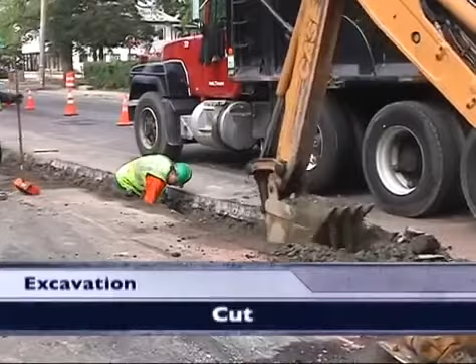First, let's talk about three important definitions. An excavation is any man-made cut, cavity, trench, or depression formed by the removal of earth or soil. That means either mechanical or hand removal. You may have heard the terms excavation and trench used interchangeably, but there is a difference. A trench is an excavation that's deeper than it is wide, usually not wider than 15 feet.

Bottom line is that nearly all trenches are dangerous if not protected, due to the fact that they're narrow and you can get trapped. Some excavations, however, especially on large building sites, may only be dangerous near the slopes. It's important to know the difference and to always be on your toes.

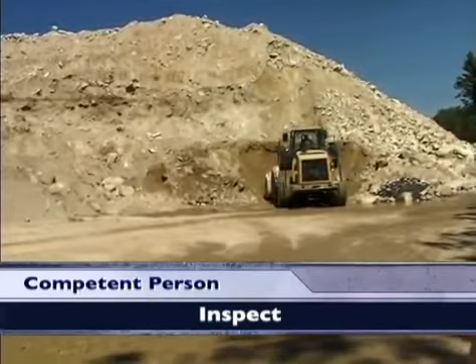You've probably heard the term competent person. I'm the designated competent person on this job site. It's my job to identify existing hazards or to predict hazards that may occur in the excavation or in the surrounding areas. Every day I have to take a close look at the conditions of the site to make sure that all the protective systems are keeping workers like you safe.

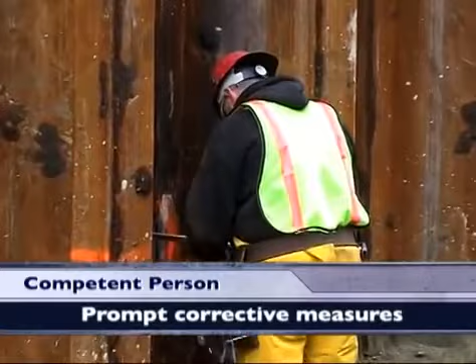I've got to determine whether working conditions are unsanitary or hazardous to workers, and it's my duty to take prompt corrective measures to eliminate any danger. Basically, it's my job to make sure that you and your coworkers can do your jobs safely.

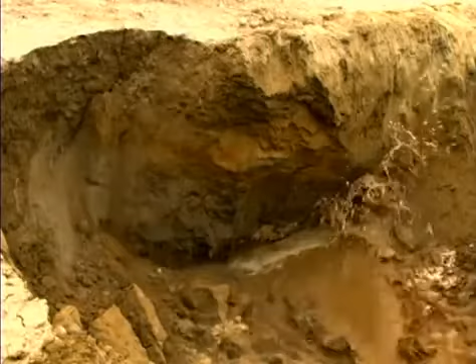Did you know that cave-ins are the leading cause of death in excavation work, and that collapses are 18 times more likely to result in death than common construction accidents? Cave-ins aren't the only dangers involved in excavation work, though. Other hazards include water accumulation, the collapse of nearby structures, and hazardous atmospheres produced by toxic gases in the soil.

That's why if you ever think that there's a potential danger of a collapse or any other type of hazard, you must tell your supervisor, foreman, or the competent person immediately. I can't stress enough how important it is to speak up. With all these potential hazards looming on a job site, no one's going to get upset if you're being overly cautious. You could be saving someone's life, possibly your own.

An employee was installing a small diameter pipe in a trench 3 feet wide, 12 to 15 feet deep, and 90 feet long. The trench was not shored or sloped, nor was there a box or shield to protect the employee. Further, there was evidence of a previous cave-in. The employee apparently re-entered the trench, and a second cave-in occurred, burying him.

Since cave-ins are the most common and the deadliest hazard in excavation work, let's look at them a little more closely. When dirt is removed, the surrounding soil becomes unstable and gravity forces it to collapse. When soil or rock falls or slides into the excavation, the cave-in could entrap, bury, or otherwise injure and immobilize people working in the excavation.

Most cave-ins occur in trenches 5 to 15 feet deep and occur suddenly with little or no warning. On average, about 1,000 trench collapses occur each year in the United States, and over 95% of injuries occur in trenches without any protective systems.

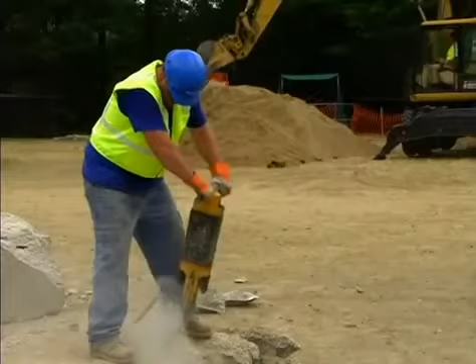Soil conditions can change and shift, so they must be constantly evaluated. There are certain factors that could change the surroundings of the site, making a cave-in more likely. For instance, it rained here last night, and water could potentially affect the state of the soil. So I constantly check the condition of the soil and of the surrounding site and evaluate any condition that may increase the likelihood of a collapse.

If you're the designated competent person on site, that'll be your job too. But it's also important for every worker on site to know and recognize some of the most frequent problems and to communicate them immediately. Water is one factor that can increase the risk of a collapse. Other factors include temperature change, vibrations from heavy equipment. Even the surrounding load, like a spoil pile, can affect the conditions of the excavation.

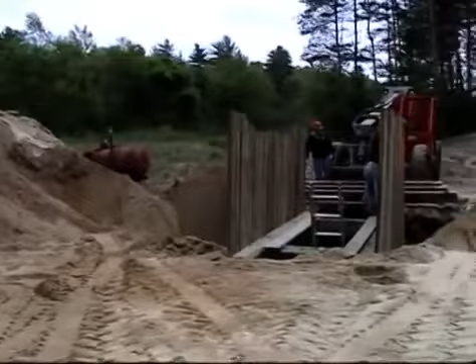Also, a lot of the soil that we work in has been previously disturbed. Previously disturbed soil is different from soil that's never been excavated. It can contain backfill or other materials that can rapidly break away from native soils. Sometimes there are visible warning signs around the excavation that can be spotted before a cave-in occurs. And if you're aware of these warning signs, your chances of getting out before a collapse increase significantly.

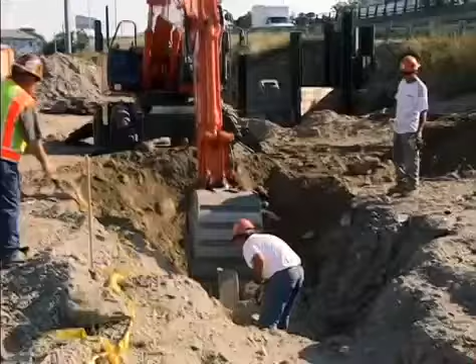Some of these visible signs may include ground settlement or narrow cracks in sidewalls, slopes, or the surface next to the excavation. Flakes, pebbles, or clumps of soil may separate and fall into the excavation, or there may be changes or bulges in the wall slope. If you notice any of these signs, get out of the excavation immediately and get your coworkers out too. A life is too high a price to pay to overlook any one factor or warning sign.

Cave-ins are possible, they can happen if you're not careful, but they can be prevented. And let's face it, preventative measures take a lot less time and effort than an emergency retrieval. There are different types of cave-ins that happen in various types of conditions. For instance, a spoil pile slide is probably the most common type of cave-in. It occurs when dirt is piled too close to the edge of a trench.

A shear wall collapse occurs most frequently in clay or layered soils. Part or all of one side of the wall begins to crumble into the trench, along with the weight of the spoil pile. The height of the falling soil is added to the weight, generating a great deal of force. An average collapse of 2 to 3 yards of soil can weigh 4,000 to 6,000 pounds, or nearly the weight of a pickup truck. A lip slide may be an indicator of a potentially more hazardous collapse to come.

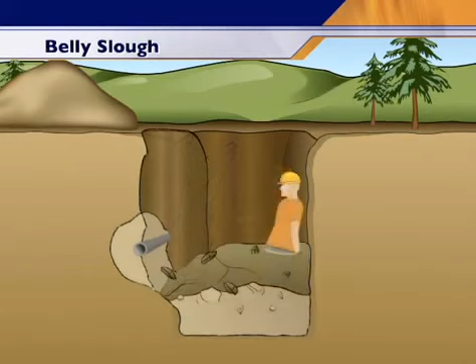A belly slough often occurs in areas near underground utilities or where running water is present. This type of slide occurs when softer soil weakens under the more stable soil. The collapse can be rapid and usually buries or traps the victim quickly. The resulting overhang makes rescue more dangerous and difficult as well. Telltale fracture lines often appear near the bottom wall of the trench before a belly slough occurs.

Boiling and heaving and squeezing are two other types of soil conditions that need to be taken into consideration when working in a trench or excavation. Boiling is marked by an upward water flow into the bottom of the cut, creating a quick condition, like quicksand. Heaving and squeezing is a downward pressure created by the weight of surrounding soil or adjacent equipment that causes a bulge in the bottom of the cut. Both boiling and heaving and squeezing may contribute to or indicate a potential collapse, and both conditions can occur even when support systems have been properly installed.

Your safety and the safety of your coworkers is the number one reason why the right type of protective system is used for the soil that you're working in. But before you choose a protective system, you have to test the soil to determine what type it is. Now, not all dirt or soil is the same. Solid rock is most stable, and sandy soil is the least stable. You've probably heard that soil falls into 4 types: solid rock and types A, B, and C soil. Let's talk a little bit about what these classifications mean.

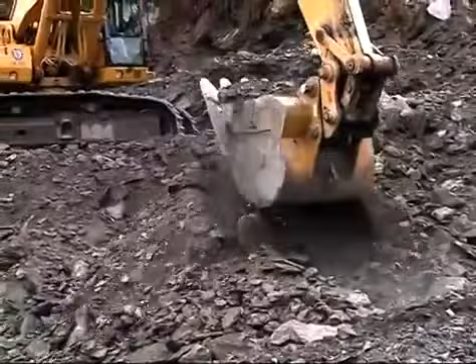Solid rock, in most areas that I've seen it, requires explosives for removal, and it becomes a lot less stable when you blast it. In certain cases, you can scrape away at it with frost hooks or vibratory hammers. But for the most part, solid rock isn't something that we work in on a regular basis.

Type A soil is stiff and cohesive without fractures or cracks. A few examples might be caliche, typically found in the southwest, or hardpan, also called glacial till. Now, you'll know this soil if you've worked in it. Hand digging is backbreaking. And if you've worked in these soils, you also know that their condition can change quickly. Caliche can be seamy, and hardpan turns to slop when it gets too wet.

Now, it's important to keep in mind that no soil can be considered Type A if it's fissured or cracked, or if it's subject to vibration of any type, or if it's been previously disturbed or has seeping water. If the soil is part of a sloped or layered system where the layers dip into the excavation on a slope of 4:1 or greater, the soil can't be considered Type A either. These layers could slide off of each other, causing a collapse. The problem is it can be difficult to determine which way the layers run.

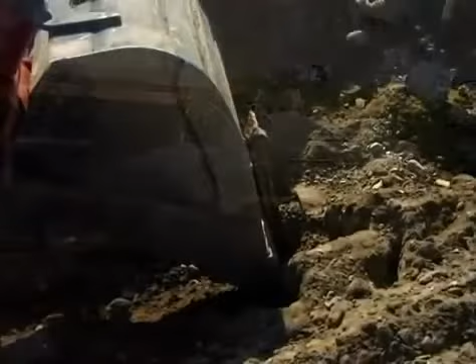Type C soil is the most granular, like sand or gravel. And Type B is somewhere between Types A and C, like subsoil or silty sand. Even some crushed or blasted rock could be classified as Type B soil. Sometimes soil may have to be reclassified if the conditions affecting its original classification change in any way, such as with the addition of water from any source. Now, many times we're digging around existing utilities as well, which increases the potential for collapse and for changing soil conditions. This is especially true with bedding materials used for most utility installations.

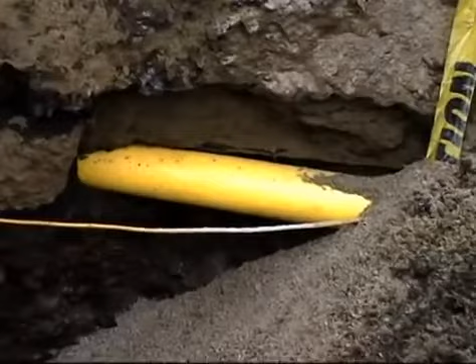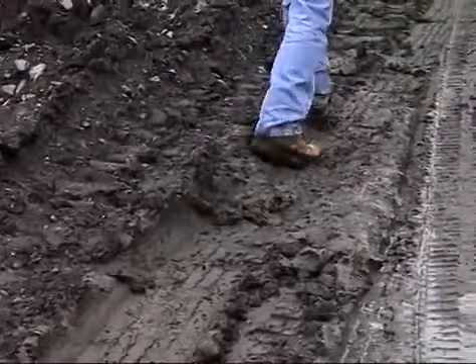Now, there are some inherent problems in classifying soil as anything other than Type C. You have to be careful because sometimes soil is layered. There may be a Type B soil on the surface, but a few feet into the dig there might be a layer of Type C soil. And how frequently do we find water on job sites? These conditions point to classification as Type C. So soil should be treated as if it's Type C unless proven otherwise.

There are several ways to classify soil. Test bores taken before work begins provide a good indication in advance of the type of soils to expect, but you can't just rely on lab results. Out in the field, besides looking at the general excavation site and its surroundings, as the competent person, I have to perform a visual analysis of the soil itself.

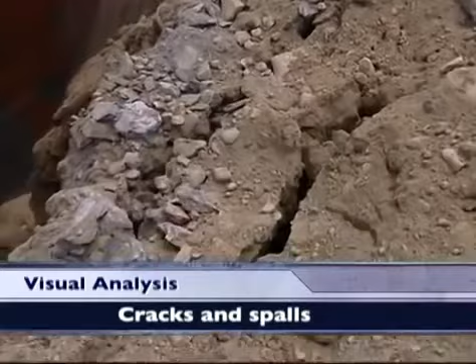I check the composition of soil samples to see if the soil is granular or cohesive. I look for cracks and spalls in the sides of the excavation and around the adjacent surface area. I also check for existing utility lines and any other underground structures, and for any previously disturbed soil in or around the excavation. I also need to look for sources of vibration and surface water. Each one of these factors can affect the excavation stability and influence the type of protection needed before you get in.

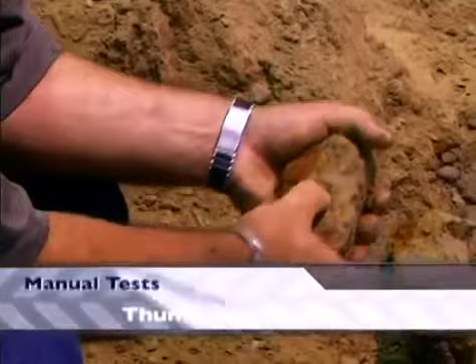Manual tests must also be performed on soil before excavation begins, and there are a number of methods that can be used. Some of the methods test the cohesion of the soil, or how well it sticks together, and other methods test the strength of the soil. The thumb penetration test is probably the easiest soil test. All you do is press your thumb firmly into the soil. If your thumb doesn't go any further than the length of your thumbnail, it's most likely a Type A soil. If your thumb penetrates the full length of your thumb, then it's probably Type C soil or very granular. The problem with this test is that it can be very subjective.

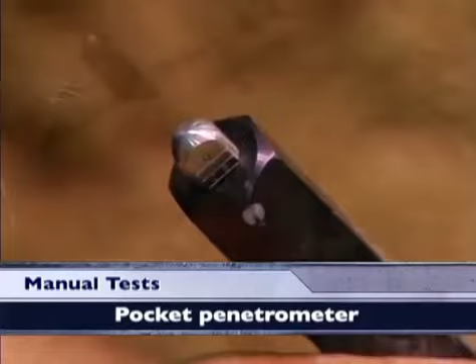When I need to document my test results, I usually use a pocket penetrometer because it gives a reading that's easily interpreted, and it's typically accepted in the engineering community. But even this device has its shortcomings. You have to try to avoid rocks and other particles that could influence the reading, and you don't want to test in an area where the soil's obviously been disturbed. It's important that the reading is taken in fresh samples, typically right from the spoil pile. You insert the shaft about 1/4 of an inch into the soil with smooth, constant force, and take the reading from the indicator ring here.

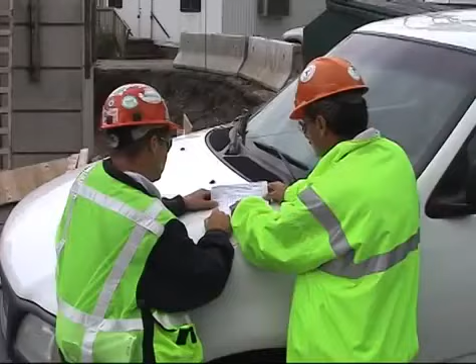The limited accuracy of manual tests is one reason why many contractors have a policy to simply classify everything as Type C. This can be a costly and time-consuming policy to implement, but it definitely cuts down on the variables and the arguments about who classified what and why. I should probably also talk just a bit about documentation. While OSHA doesn't require that these visual and manual evaluations be documented, it's a good idea, especially on the off chance that something bad does happen on site. Many contractors use a daily inspection form like this one to document their safety efforts.

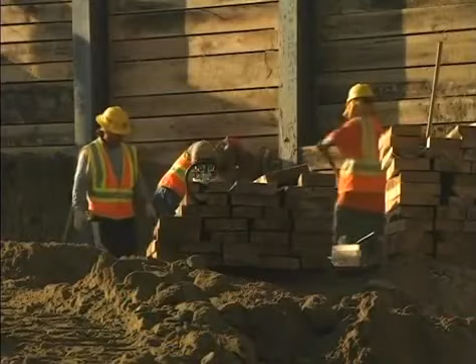Once you've finished performing visual and manual tests and you've established a soil type, then you can determine what type of protective system you'll need. If your company automatically assumes Type C, then that planning process has already begun. There are various types of trench protective systems to meet pretty much every type of soil condition.

Protective systems protect workers from cave-ins, from material that could fall or roll from an excavation face or into an excavation, or from the collapse of adjacent structures. Protective systems are required in nearly all excavations. Now, selecting a protective system for an excavation depends on soil conditions, the depth of the trench, and environmental conditions surrounding the site. One thing that's for sure, though, a registered professional engineer must design protective systems for excavations any deeper than 20 feet, no exceptions.

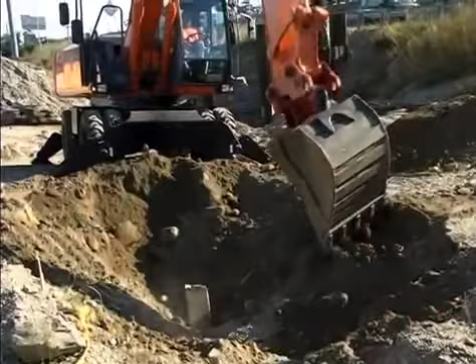You can slope or bench an excavation, which means cutting away and angling the excavation face, or you can install support systems like trench boxes or shoring. When you slope an excavation, you cut the sides back to a safe angle using relatively smooth inclines. The safe angle used in sloping and benching, known as the maximum allowable slope, depends on the type of soil that's being excavated. For Type A soil, the maximum allowable slope is 3/4 to 1, or about 53 degrees.

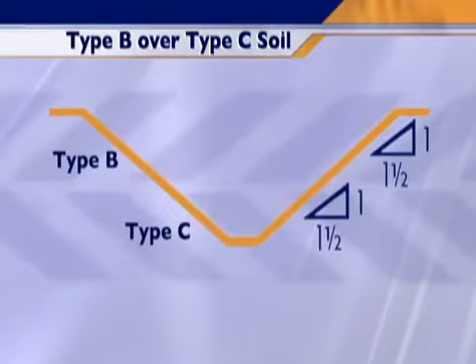Type B soil is 1 to 1, or about 45 degrees. For Type C soil, the maximum allowable slope is 1.5 to 1, or 34 degrees. The maximum allowable slope varies for layered soils as well. Basically, as you can see, the more granular the soil, the more gradual the incline.

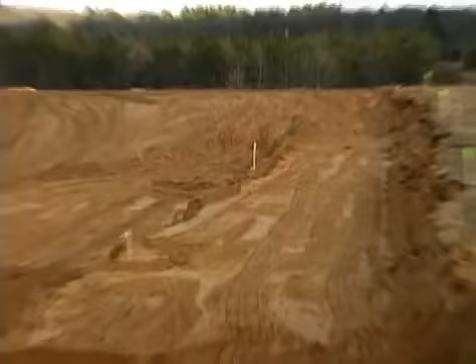Benching is similar to sloping, but instead of smooth inclines, you cut the sides of the trench wall back using a series of steps. Again, the angles for benching depend on the type of soil. One important thing to remember, though, is that you can't bench Type C soils. They just won't hold the bench properly, and they could collapse.

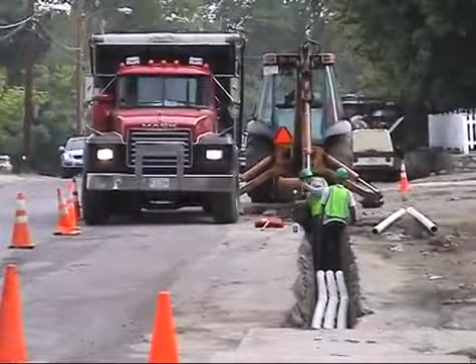Many times, trenches are in narrow places or roadways, so sloping and benching aren't options. In these situations, support systems like shoring or shielding are typically used. There may even be instances where you may have to combine sloping or benching with a support system. Shoring structures are typically made of metal or wood. They're designed to support the sides of a trench and prevent soil from caving in. They basically consist of plating held firmly in place with expandable braces.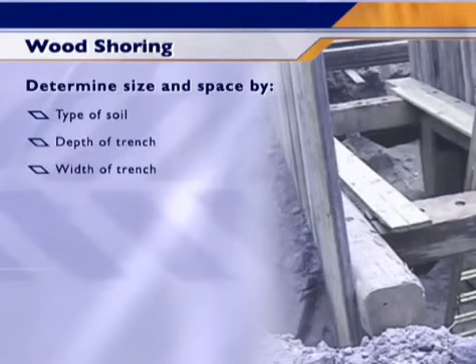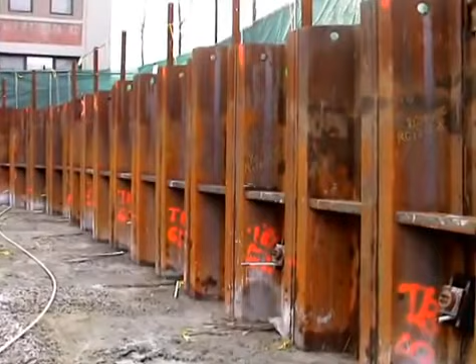There are many types of shoring systems. Some of them are easy to install and others require quite a bit of experience and engineering. Before wood or timber shoring is installed, proper sizing and spacing of the cross braces, uprights, and wales has to be established. The proper size and spacing of shoring components are determined based on the type of soil, the depth, the width of the trench, and how much space is actually needed between the cross braces to perform the work. Other types of shoring may include aluminum hydraulic systems, driven interlocking sheeting, soldier piles and lagging, pneumatic shoring, and screw jacks.

Shoring systems have their advantages and disadvantages. For example, shoring can be custom tailored to the trench. It can be used in narrow confines and is typically easier to install around underground utilities. However, shoring requires a greater technical knowledge to be installed correctly, and portable shoring systems are typically not suitable for deeper excavations.

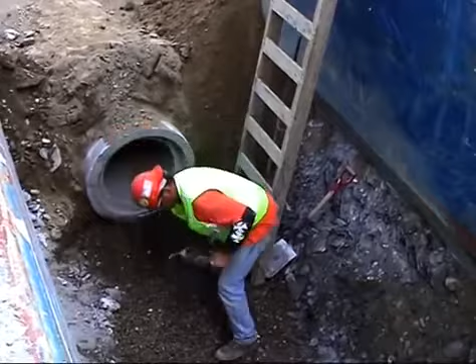Shielding structures, or trench boxes as they're often referred to, are placed inside trenches or excavations and are strong enough to protect workers in the event of a cave-in, so long as the workers are within the confines of the box. I have experienced a trench cave-in where a brother union member and myself were in an excavation, and the trench caved in on the opposite side of the box, and luckily the person that I was with got into the box in time before he was crushed.

The one suggestion that I would make to all members of all trades is training. Training is key. Training, training, training. Always come back. There's never too much safety that you can learn.

Shielding systems also have advantages and disadvantages. They're designed to be moved along the trench as the work progresses and can usually be installed faster and used in deeper trenches than portable shoring systems. But on the other hand, the size, weight, and bulk of a typical trench shield make transporting them to the work site as well as within the trench difficult. Whether you use shoring or shielding, it won't protect you if you aren't inside it.

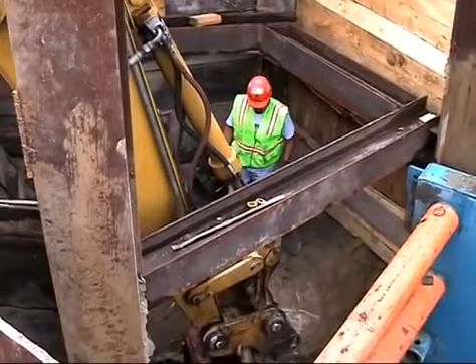Remember, if the excavation is more than 20 feet deep, the entire excavation protective system has to be designed by a registered professional engineer. We can't just throw something together. I should also point out that manufactured systems like hydraulic shores and trench boxes come with what's called a tabulated data sheet. This sheet documents the acceptable design load for the specific device being used.

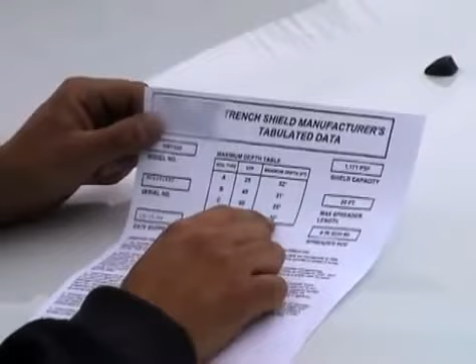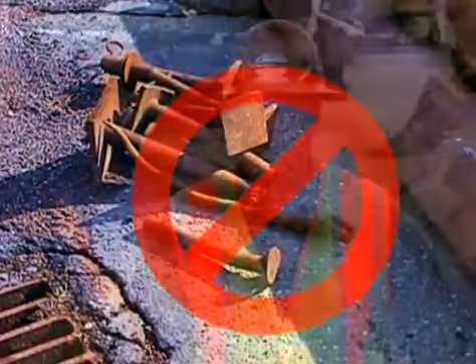For instance, a box might be designed for depths of up to 20 feet in a Type B soil, but it may only support depths of 15 feet in a Type C soil. Now, these sheets need to be kept on site for reference. Make sure that the serial numbers on the sheet match the numbers on the box, and never modify a system without written consent from the manufacturer. No matter how many years' experience we have in the field, most of us aren't structural engineers, and we can't change a protective system's design without their input.

Back in 1979, I was a laborer out of Providence, Rhode Island, Local 271. I was a top man watching for the safety of the people inside. Unknowingly, the earth around the outside of the trench box gave way. We fell, I would say, into the earth 10 feet. It undermined from water outside the trench underground. And it caused just a washout, and we went down.

The only thing that was showing was like half of my right arm. And that's how they knew where we were. Through the quick response of other laborers, they dug us out. And, you know, we were scratched up a little, a couple of cuts from shovels, but we were all right, thank God. We learned, if we ever were buried, not to panic, because naturally you're using up the oxygen that would be in your body under a stressful condition. My message is to work safe in and around these trench areas, around machinery. If they foresee a condition, report it immediately to their foreman out on the job site.

Even after testing soil and determining which protective system will be used, problems can still occur. That's because there are still many other safety and health issues that need to be taken into consideration before digging and throughout working in an excavation. Things like surface encumbrances, utility lines, hazardous atmospheres, fall protection, roadway safety, and water accumulation, just to name a few. That's why it's so important to have a competent person on the job site at all times.

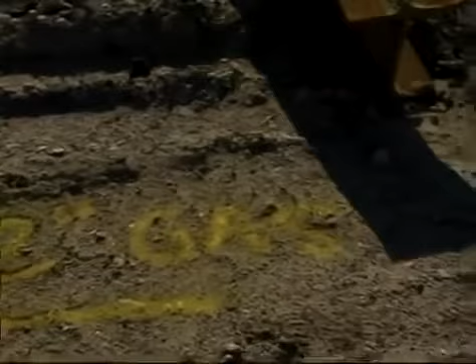Let's face it, when performing excavation work, there's always a chance that underground utilities exist. Digging into underground utility lines can cause hazards like fires, explosions, flooding, electrical shocks or arcs, and toxin inhalation, all of which can cause serious injury or even death. Before digging, your employer must contact the utility companies or the property owners to locate sewer, telephone, fuel, electric, water lines, and any other utilities. If any underground utility lines or other installations exist, they must be protected, supported, de-energized, or removed. And don't forget, utilities can be overhead as well. Always maintain a minimum of 10-foot separating distance from overhead power lines.

Mike, there's a broken pipe up there on the hill. Can you tell me a little bit about what happened there? Well, we were ready to cut and cap it up on the top of the hill, and the water department said it was shut down. We put a hoe ram through it. Ended up it wasn't shut down. We ended up filling up the entire area you see here that's been blasted out. About 100,000 gallons or so filled the area.

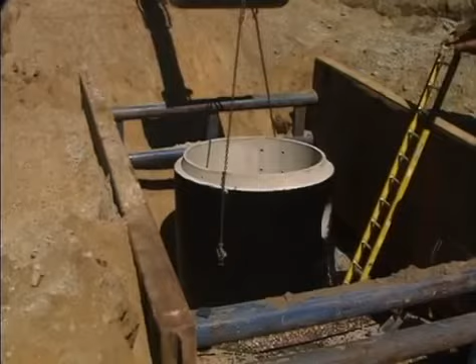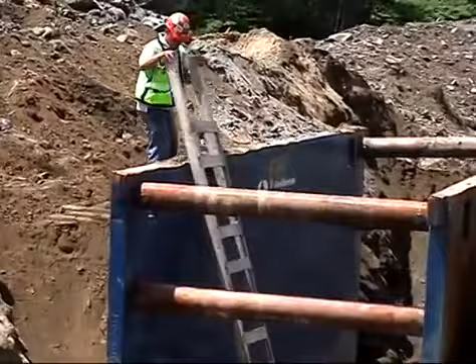When working in a trench, you can't just jump into it and try to find a way to climb out later. There has to be a safe means of entry and exit for workers, like a ladder, stairway, ramp, or other safe means. You must be able to exit a trench quickly and within 25 feet of where you're working. It's also a good idea to make sure that there's at least one ladder per trench box so workers don't have to climb over or through spreaders to get out.

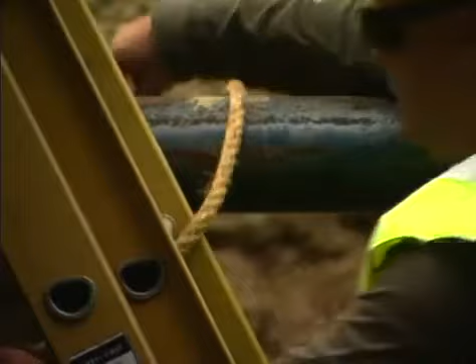Lifting equipment such as loader buckets and backhoe shovels are not safe means for entering and exiting a trench. If you use a ladder, it has to be inspected prior to use and it must be installed and secured properly. Ladders must also extend at least 3 feet above the landing surface. If you use structural ramps, a competent person must design them and you need to be able to walk upright up the ramp.

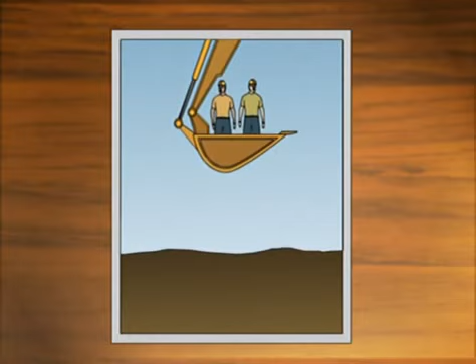Two plumbers who had been working in a trench were being hoisted to street level in the bucket of an excavator. As the excavator operator started to swing, the bucket jerked, causing one employee to fall approximately 14 feet. The employee struck his head on the pipe in the trench, causing a fatal injury.

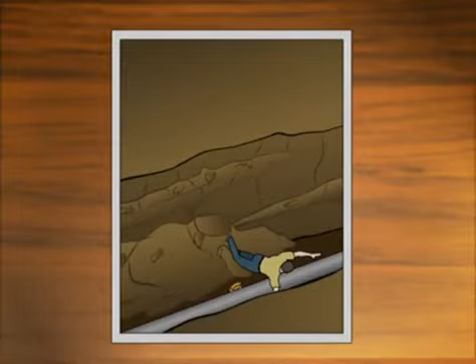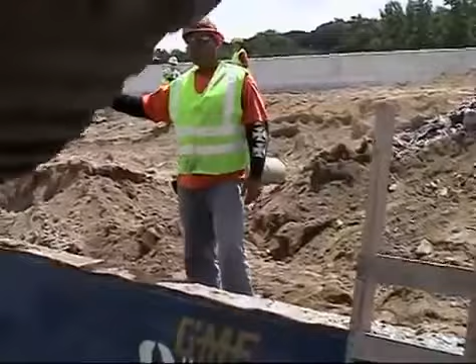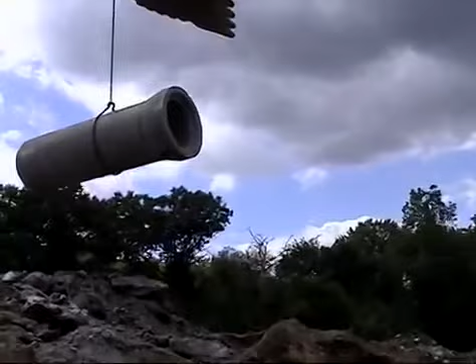Remember that you're not the only one working on the site. There may be other workers operating equipment or machinery, and they may not always see you. Be sure to make eye contact with the operator of any type of heavy equipment to let them know that you're there. And avoid the sweep, reach, dump, or path of any machinery or equipment too. Likewise, don't stand under any loads handled by lifting or digging equipment, or near any vehicle being loaded or unloaded.

If there's mobile equipment operating next to or at the edge of an excavation, use some type of warning system such as barricades, hand or mechanical signals, or stop logs to let the operator know where the edge is. I also make it a habit to wear my reflective safety gear whenever I'm working around heavy equipment. It makes it that much easier for the operator to see me. Again, this is a requirement that many contractors are instituting, and I think it's a great idea.

Excavation and trenching operations are often conducted on roads and highways. When you're working on or near a highway, it's important that you wear reflective safety gear. You need to make yourself stand out as much as possible in a situation where there are drivers and heavy equipment operators around you. Make sure that you inspect your work area frequently, and wherever possible, minimize the effect of excavation operations on traffic, such as changes in traffic patterns. New traffic patterns can be confusing to drivers, which can make them dangerous for you and your coworkers.

Don't ever turn your back on traffic. Make sure that you see them even if they don't see you. And never stand in an open traffic lane. Show pedestrians and motorists where you expect them to go, and give motorists enough time to respond. But have a buffer space prior to the work area, just in case.

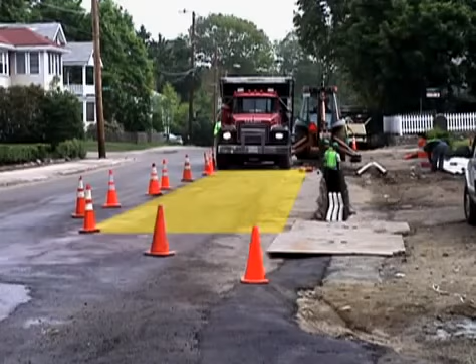Think about how the weather conditions may affect visibility and stopping distance. Drivers have a harder time seeing in heavy rain or fog, and have a harder time stopping when it's snowing or sleeting. Make sure that there are enough warning devices such as cones or barrels on the roadways, and replace any damaged signs or devices that you see immediately. They're not going to be very effective if they're not visible.

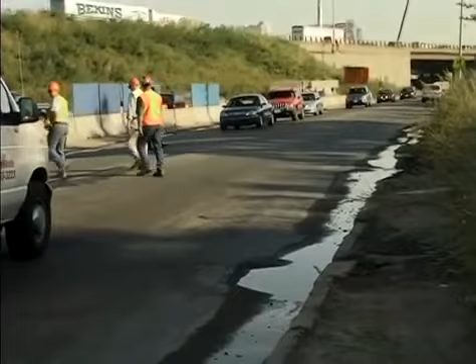Everyone working on the site must have adequate training. Some states even require certification for flaggers or the use of police details for traffic control. But regardless of who's directing traffic, it's important that everyone know what their job is and where they should be. Perhaps most importantly, plan an escape route just in case an emergency does occur.

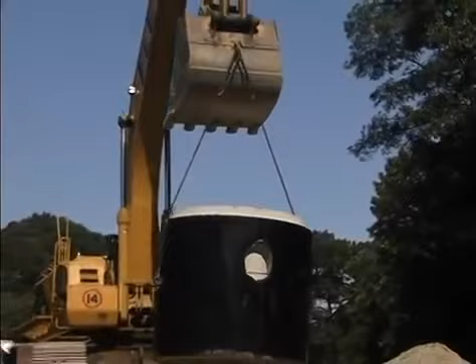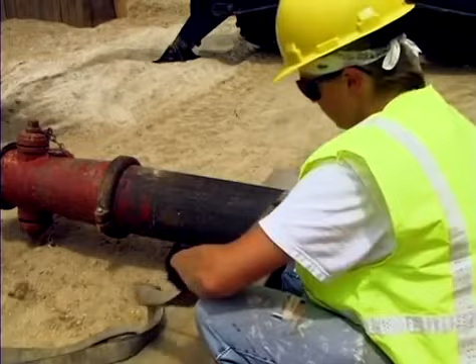Lifting and moving heavy loads with rigging cables and hooks are common operations on excavation sites, so it's important that safe rigging procedures are followed. Any rigging performed on site must be done under the supervision of a competent person who's experienced in rigging, and all rigging equipment must be inspected by a competent person prior to use.

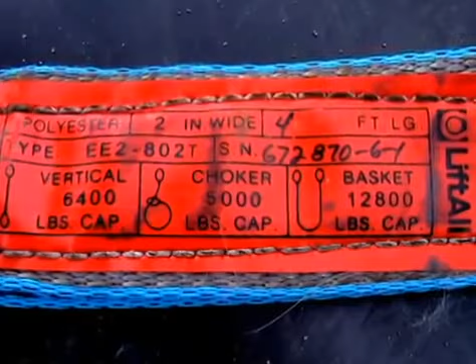Chains used for lifting should be grade 80 or better and marked as such. And make sure that multi-leg cable slings and nylon slings are marked with their capacity as well. Never pull slings out from under a load with equipment. This can cause excessive abrasion. Remove damaged equipment immediately and notify your supervisor or the competent person that the equipment is unfit for use. Lastly, make sure that you're properly trained, and if you have a question, don't be afraid to ask.

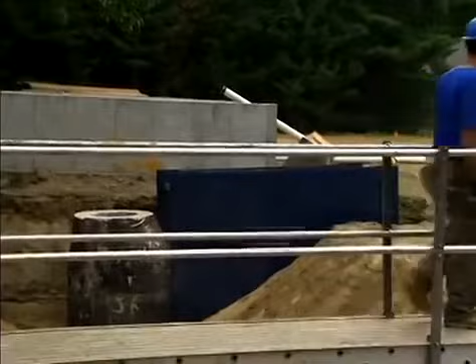Most of the time, workers need to get from one side of the excavation to the other, so proper walkways must be provided. Any walkway that's 6 feet or more above a lower level should be equipped with guardrails to prevent falls. To avoid slip and fall accidents, make sure that all access and walking surfaces on equipment are oil and dirt free, and that slip-resistant finishes are maintained. Some areas may also require guardrails or tie-off on equipment for service personnel.

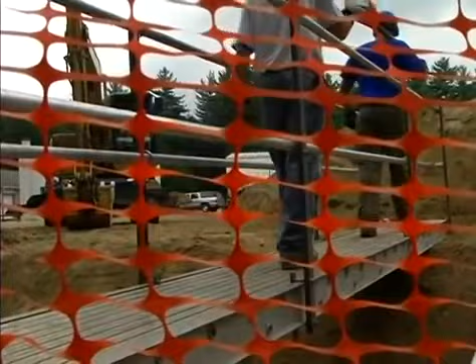All wells, pits, shafts, and remote excavations must be barricaded or covered and clearly marked so that workers don't fall in, and workers and materials should stay as far from the edge of the excavation as possible. Remember that many folks can be curious, especially kids. These barriers can help protect them as well.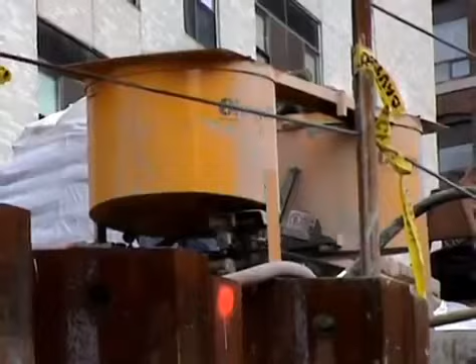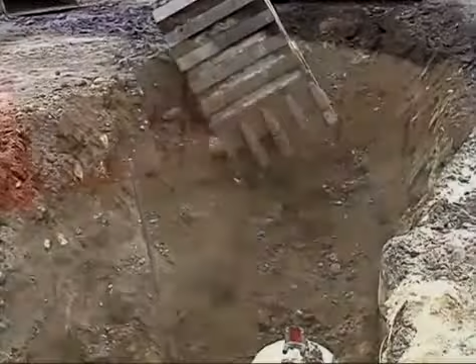Another hazard to look for is loose rock, soil, stored materials, and equipment on the face of or near the excavation. These things can potentially fall or roll into the excavation or overload the edge and collapse the excavation walls. To prevent a spoil pile slide or possible trench collapse, scale the face of the excavation to remove any loose material and set up barricades to contain anything that might fall. Try to place spoil piles so that rainwater is diverted away from the excavation.

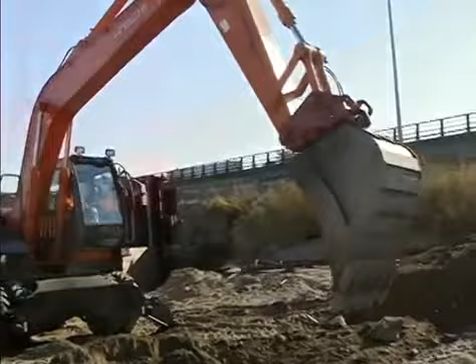And it's important to remember to keep everything, spoil, materials, and equipment at least 2 feet from the edge of the excavation. If there are workers that are higher on the slope of an excavation than other workers, workers on the lower level must be protected from falling, rolling, or sliding material or equipment. If you can't safely store the spoil on site, move it to a temporary site.

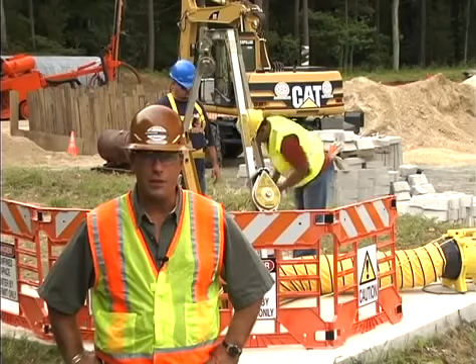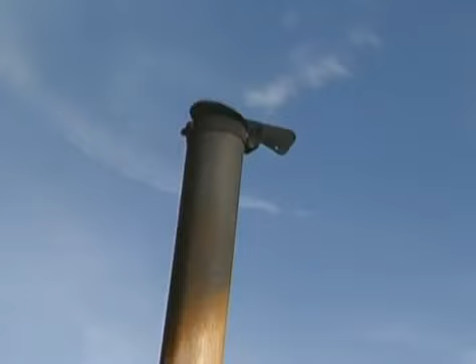The potential for atmospheric hazards can be found in many areas associated with excavation work. Potential atmospheric hazards include any atmosphere with less than 19.5% or more than 23.5% oxygen, sewer or natural gases, and hydrogen sulfide, typically found near landfills. Even the exhaust from machinery can cause the air to be hazardous. Trenches, pipes, manholes, catch basins, and foundation excavations with limited air movement can contain toxic or explosive atmospheres. And atmospheric hazards are especially dangerous in trenches because of the lack of air circulation.

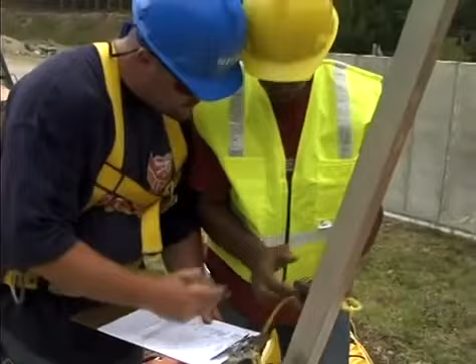Before you enter an excavation that's more than 4 feet deep or any confined space, the competent person must test the air for oxygen deficiency and any other air hazards. Air monitoring must be repeated as often as necessary, sometimes even continuously, to ensure that the air remains safe for workers. Respiratory protection or mechanical ventilation and emergency rescue equipment must be readily available when working in these types of conditions. If you're working on an excavation site with potential atmospheric hazards, you will need emergency rescue equipment. This includes breathing apparatus, safety harness and line, or a basket stretcher.

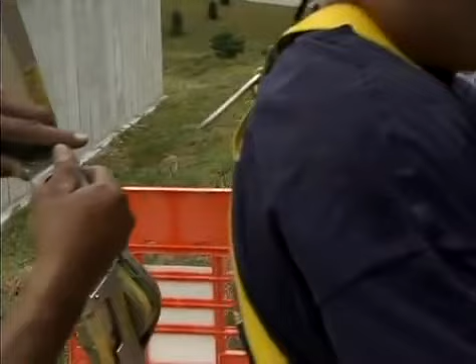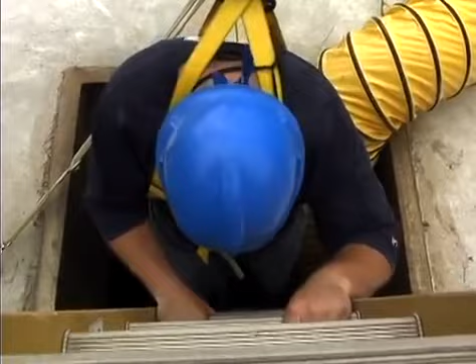If you enter a deep and confined footing excavation, you must wear a harness with a lifeline, and the lifeline must be separate from any line used to handle materials. Don't ever attempt to rescue unless you're properly trained to do so. Otherwise, you could end up a victim yourself. Over 50% of confined space fatalities are would-be rescuers.

Air isn't the only thing that can be contaminated on an excavation site. Soils can be contaminated too. It's good practice to perform a soil evaluation to make sure that the soil is not contaminated. Unfortunately, this isn't always done. So it may be up to you to catch any visible signs of contamination in the soil. Keep an eye out for oil sheens on standing water or chemical odors or staining of soil. Dead or distressed vegetation or buried containers, drums, and creosoted timbers could be indicators of contaminated soils. If you notice any of these warning signs, bring them to the attention of your supervisor immediately.

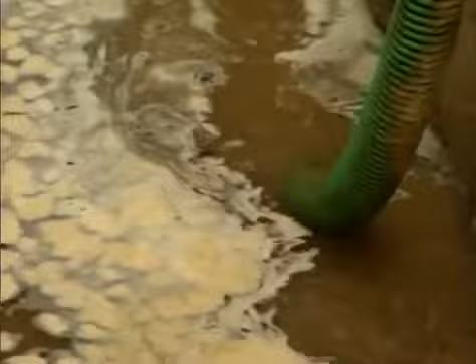Water accumulation in an excavation also makes for a dangerous situation for a number of reasons. Water softens the soil, which can lead to a cave-in. It makes getting out of an excavation in an emergency even more difficult for workers. Water accumulation in an excavation also creates electrical and drowning hazards. You should never work in an excavation with standing water or where water is accumulating unless adequate protections have been taken. Protections against water accumulation include installing special support or shield systems, using safety harnesses and lifelines, or removing the water with pumping equipment. Your site's competent person must monitor procedures against water accumulation to make sure that they're effective.

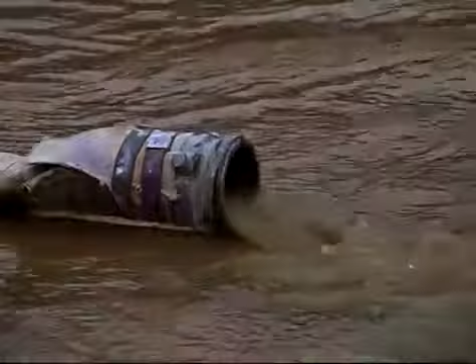Workers are not permitted in any excavation below the base or footing of a foundation or a retaining wall that's likely to be a danger to them. The only exceptions are when a support system, like shoring or shielding, is installed, or when the excavation is performed in stable rock, or when a registered professional engineer has determined that the excavation activity will not affect the structure nor pose a threat to the workers.

Even after all precautions are taken and every safe work practice is carried out, you and every worker on site must be prepared in case the worst does happen, and you must be able to think and react quickly should an emergency occur. Emergencies typically come about quickly and without warning in excavation operations, and they can sometimes very easily result in injury or death.

Excavation and trenching emergencies are not limited to just cave-ins. Material, equipment, or workers could fall into an excavation. A worker could succumb to a hazardous atmosphere, come in contact with an electrical line, or be struck or crushed by vehicles or equipment. What if the protective system fails? Would you know what to do in the event of an emergency? Luckily today, these guys are just practicing, but tomorrow it could be the real deal. And so the faster you react, the faster they can react.

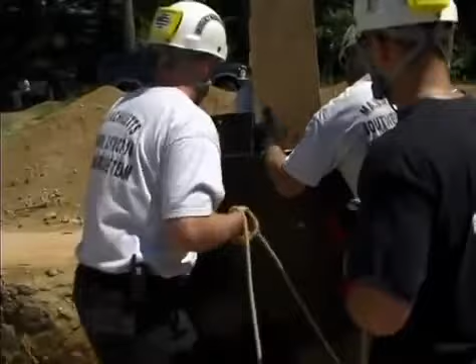When you start working on a job site, make sure that you know the location of the nearest landline phone and any phone numbers that you might have to dial in your area. Remember that some places don't use 911 as their emergency number, and cell phones don't work on every job site. Your company should have an emergency action plan, and it must be communicated to every single worker. If you're not sure what the emergency action plan is for your site, don't be afraid to ask questions. Your knowledge could help prevent serious injury or even death.

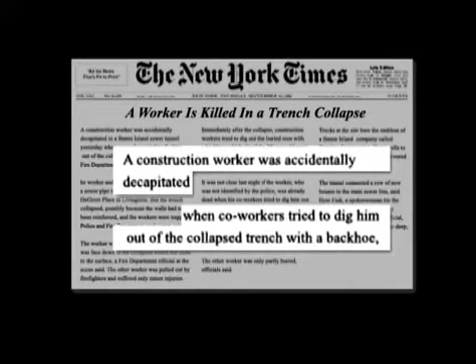Trench and excavation retrievals are extremely dangerous operations. Additional collapses could occur, or utilities could collapse into unsupported trenches. Attempting to use equipment to dig a trapped worker out could result in decapitation or other very serious injuries. Trapped workers are frightened and can become frantic, and would-be rescuers react in much the same way. This puts the victims in even greater danger, and the rescuers could become victims themselves. This is why emergency retrieval should only be executed by people who are properly trained and equipped to perform them. So don't ever enter the trench during an emergency without proper training.

You can do your part to help, though. Keep calm, secure the site prior to the rescue team's arrival. Shut down all equipment, move materials and tools away from the trench, and account for all workers on site. But once the emergency personnel arrive on the scene, back up and let them do their jobs. Rubberneckers can get in the way of trained rescue personnel, and that could cost valuable seconds, which could be the difference between life and death.

We have been activated once in central Massachusetts for an incident where a gentleman was working at a construction site, putting in a foundation, happened to have a very high water table in the area, and the gentleman got stuck in the mud approximately up to his waist or a little bit higher. The contractors worked approximately 2 hours, 2.5 hours prior to notifying the local fire department that there was actually an emergency on scene. Once the local fire department got activated, they arrived on scene and they activated our technical rescue team. We responded with all our members, and once we arrived on scene, it took us approximately a half hour to remove the victim from the mud.

Some of the injuries we could have expected would have been like the crushing syndrome. Had it been like chest level, obviously the patient wouldn't have been able to expand his lungs or her lungs at the time. So we had to allow for that during the extrication so we don't have a sudden onslaught of blood rushing through the body where the body was compressed.